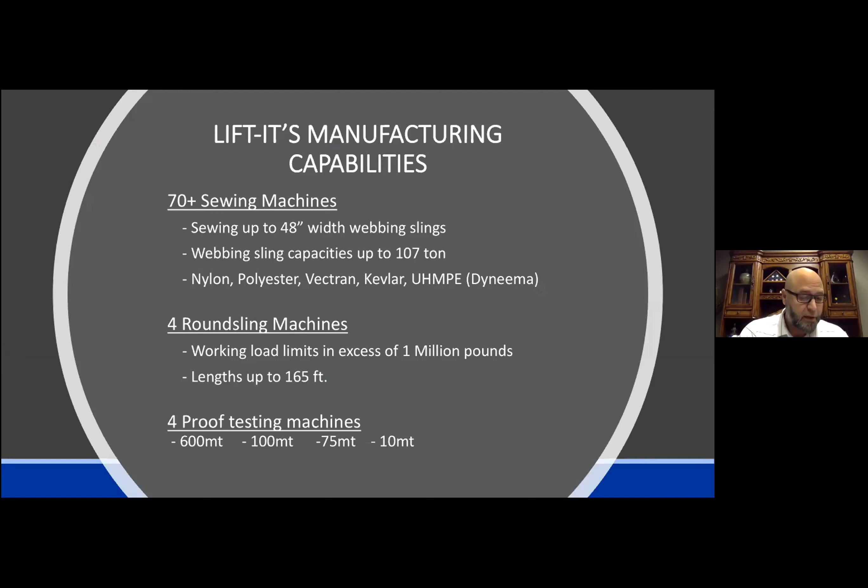We currently reside at 1603 West 2nd Street. Needless to say, we had some room to grow, bigger, wider, taller. So it's been a great addition. We're currently located about 15 miles east of Pasadena, probably 40 miles as the crow flies from LAX International Airport. In the past 40 years, we've amassed a fleet of 70 plus sewing machines, 4 round sling twin path machines, and 4 proof testing machines.

Many of you know Mike Sr. and can attest to his unwavering dedication to quality. He always told me, no matter what you do, just be the best at it. This is our purpose. Excellence is not our goal, rather our everyday normal. With a vast array of product offerings, from warnings to the cleanliness of our production environment, many would say you certainly get the whole enchilada with Lift-It.

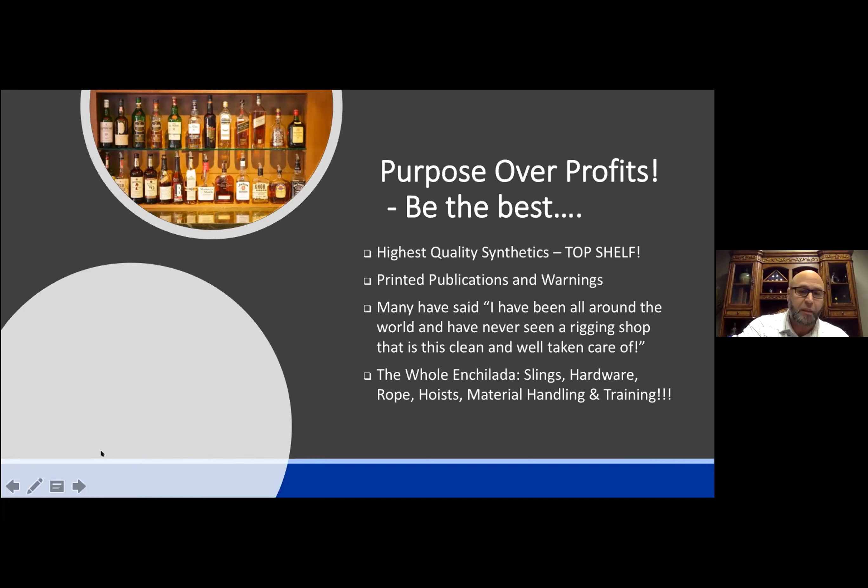Many folks that have come here can tell you how great we are, but if you walked in and our place was a pig pen, obviously you'd have some doubts, right? So many folks from around the world have been here and said it's simply one of the cleanest sling shops, and simply the gold standard.

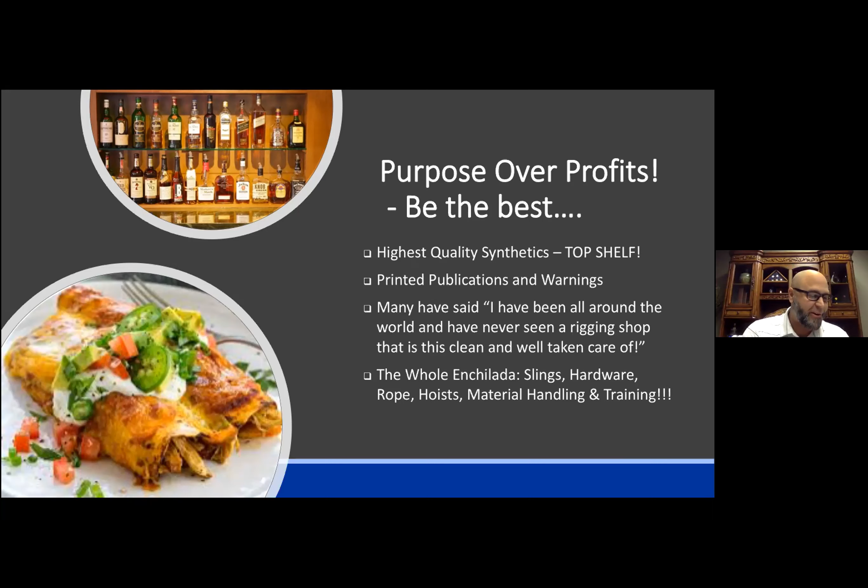We're best known for our quality, lightning fast lead times, superior tagging methods, product innovation, and last but certainly not least, user warnings and guidance.

Many folks make these claims, but I dare you to call me at 1 a.m. and get gear on your next flight at 0600 out of LAX. You think I'm kidding? Go to my website - my contact information is the first emergency number. Now, I don't know what I did to deserve that, but here we are, here I am. Just make sure when you call me that you have your credit cards ready, and we certainly do take American Express.

With over 150,000 slings, domestic and import, in stock, and nearly 20 tons of various types of K-spec fibers, HMPE, and polyester round sling, one could say we're certainly prepared for battle.

Here's an overview of our production facility in 2020. When you need additional room, you grow up - you go upwards, as long as you have the ceiling height. This was an additional mezzanine that we added, giving us 5,000 square feet of additional second floor production. This addition gives us much needed room for fabric processing, cargo net production, and fine needle sewing areas.

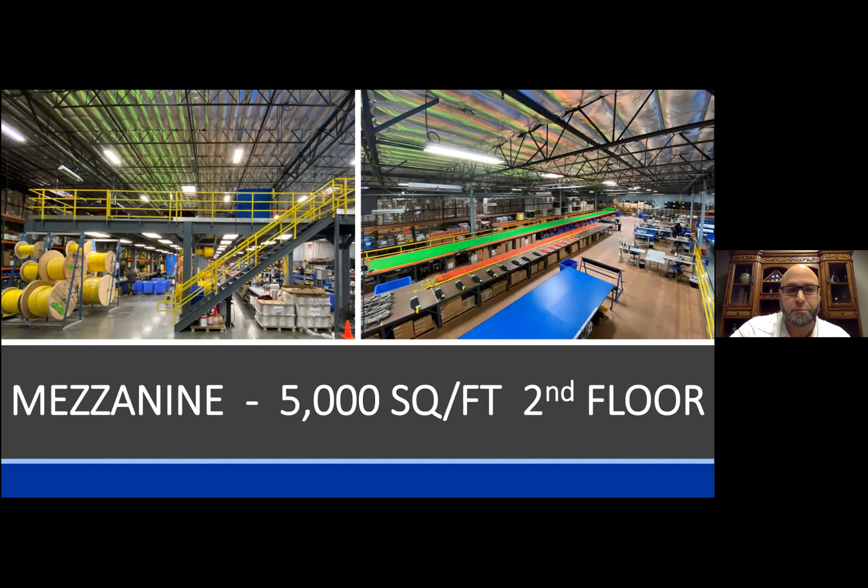With our recently added ZOM test bed, we have not one, not two, but four test cylinders. The largest being 600 metric ton, or 1.32 million pounds. And just as important as the high end of our testing capabilities is the low end range, where our 10 metric ton cylinder calibrates down to a precise 400 pounds.

I personally led our testing department for many years, having operated many test beds. I can tell you I'm truly overwhelmed with the quality that ZOM offers, not to mention their software. It's been a great pleasure dealing with a true gentleman, Mr. Arnie Nyman.

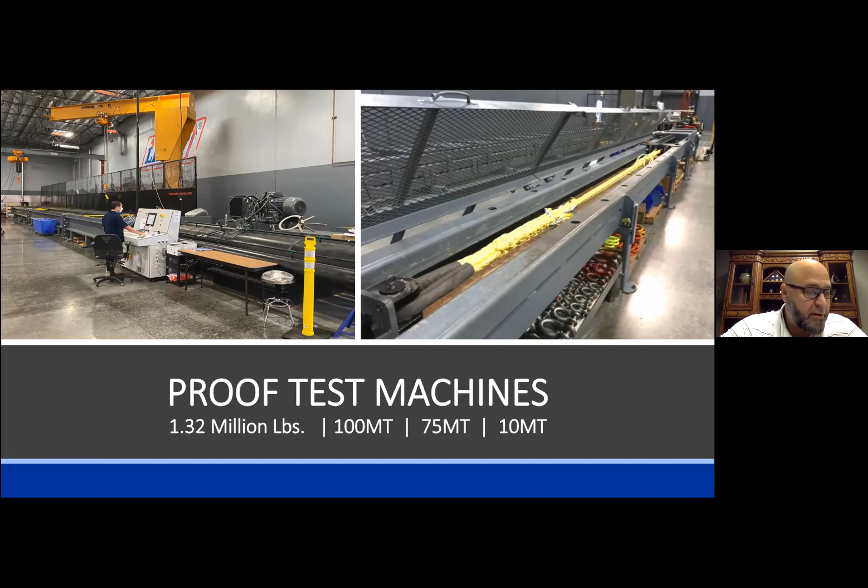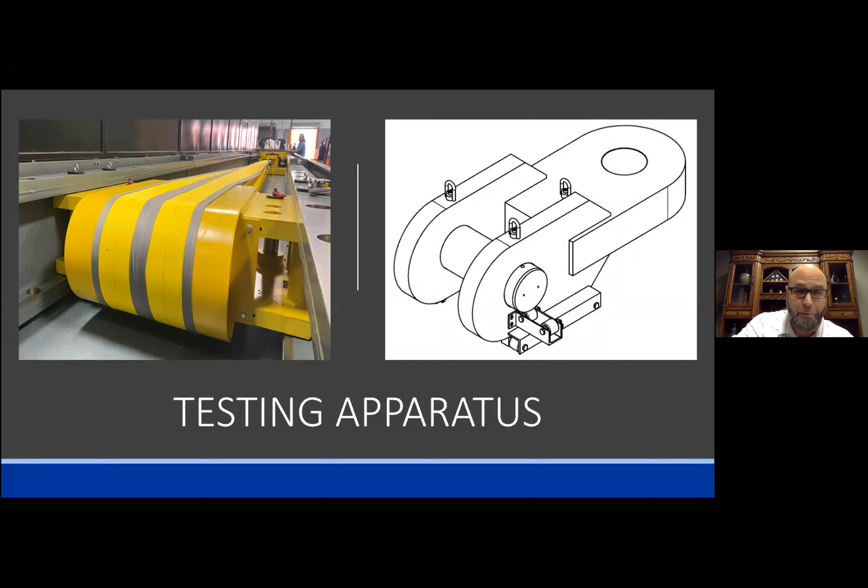Some of the testing setups I've seen and witnessed over the years, only Rube Goldberg would be proud of. We took synthetic specialists to a whole new height with the design and fabrication of our horizontal pin adapters and wide body cargo testing apparatus. To all of us that have tested a wide body cargo, we can all attest that we've maybe ruined one or two. So fixtures like this certainly help the application and testing.

Tagging, where should we start? Boy, oh boy - with great product comes great labeling methods. How many slings have we removed for illegible tags? A few. So I would say the days of the magic markers probably need to be put to bed.

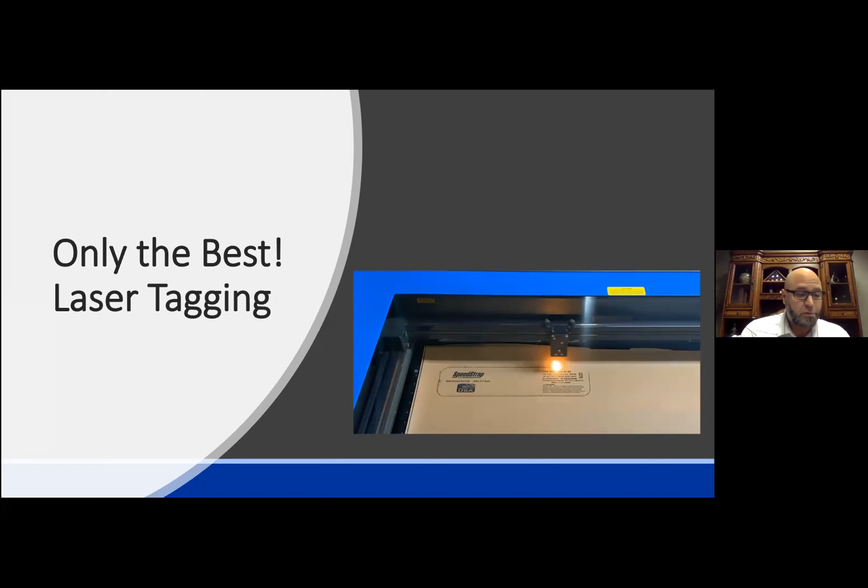We use a synthetic leather technology. It's twice as strong as standard leather, and also resists moisture and oil absorption. So it's definitely a very solid solution. And with the laser technology, it is very easy - your name, my name, your logo, my logo, truck number, crane number, you name it. This tagging method coupled with the tagging material yields one of the best tags in the industry.

One of the staples of our facility is certainly the Slingmax twin path and round sling department. With fabrication lengths up to 165 foot and ratings up to 1 million pounds, it only takes one call to become a believer in our ability to take it across the goal line.

And don't forget, when you become the President of the United States, we do have a debogging system for you, and we can pull you back onto the runway if your pilot overshoots.

Synthetic rope has often been around, we've been around for a long time, and is often used. But where we see many fall short is the tagging methods and user guidance. For the last 8 to 10 years, we've been on a phenomenal quest, which has resulted in some of the finest 12-strand UHMWPE, nylon, and polyester rope slings on the market. The growth has spawned the need for a dedicated synthetic rope department, complete with rope splicing tables, electric winches, and straight blade saws to make cutting this tough fiber a breeze. We also have additional splicing tables that'll be installed in Q3.

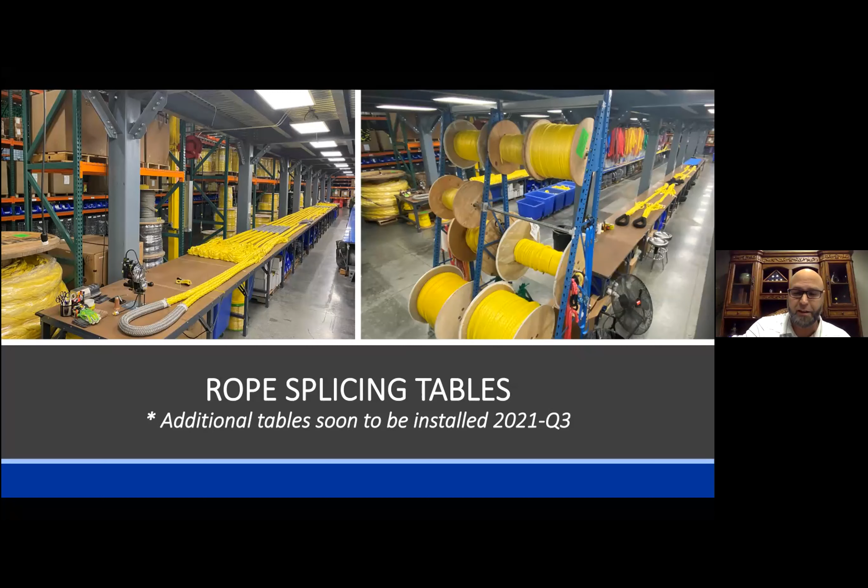With over 100,000 feet of UHMWPE 12-strand fiber ranging from 1/4 inch to 3.5 inch in stock, there is no job too big or small. We certainly splice them all.

Let's not forget about web sling production. Many of us, this is how we started and forged our company. And I often say for a few thousand dollars, you're the new proud owner of a sewing machine, and you move into a garage and boom, another competitor is spawned, right? So it's very easy to get into the business.

The truth of the matter is, in many cases, where many stumble is the skill and craft necessary to tackle big jobs and small jobs for that matter. So from 30-ton to 40-ton vehicle handling systems to 42-inch wide-body cargos that cradle fully loaded solid rocket boosters, we're ready, willing, and able to handle everything from mild to wild.

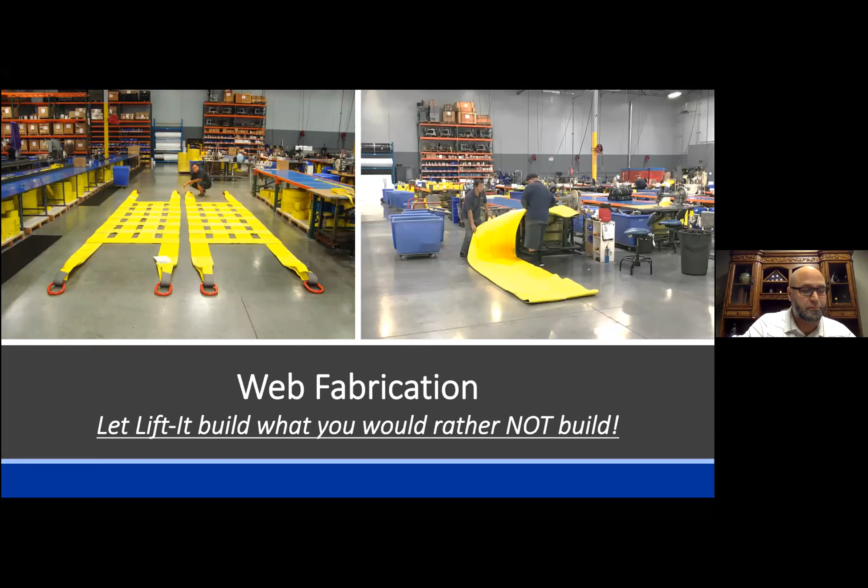Cargo nets are one of the most misunderstood products in our industry. We want to take your cargo net nightmares and turn them into pleasant, profitable dreams. No job is ever too big or too difficult. If you have a cargo net conundrum, need a helping hand, or decide to start one of the most successful private rocket companies in the world, look no further than Lift-It for your cargo net needs.

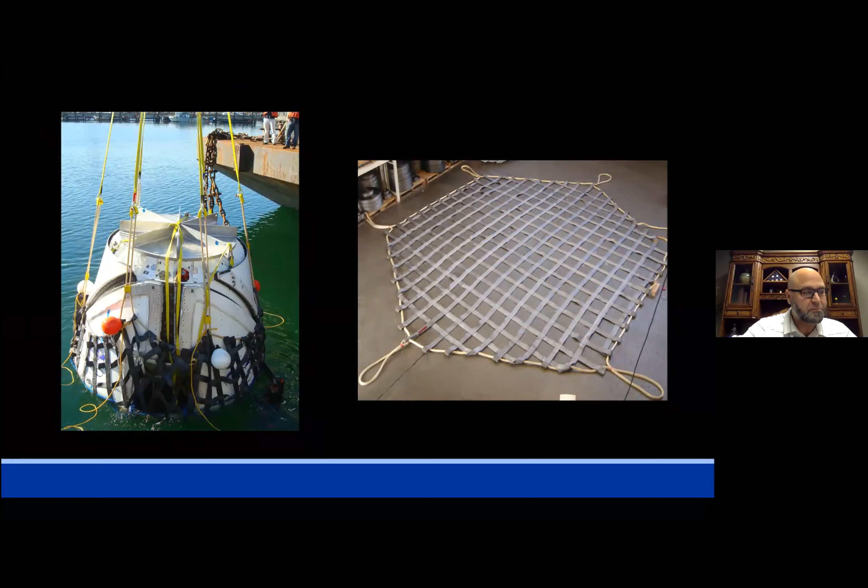Here's one more example of what many would look at and run far and fast from. This is one of the largest cargo nets to date that we've manufactured. It was so big we made it in 4 separate quadrants, each weighing in and around 800 to 900 pounds. Those quadrants were then connected with slings.

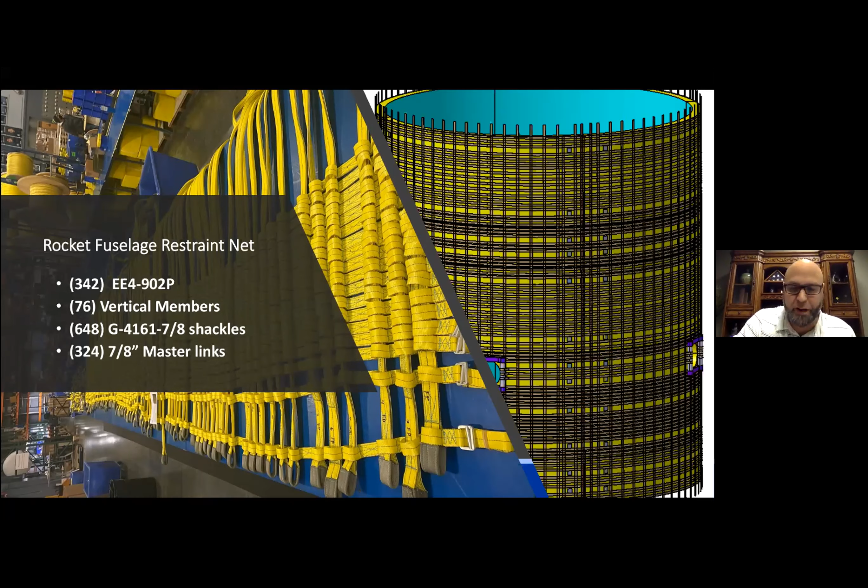It was about 400 4-ply slings, connected with 648 Van Beest green pin shackles, which then connected to a master link as a joining agent. Needless to say, it was quite a phenomenal feat of manufacturing and engineering. And if you can't let me borrow your rocket conical, fear not, we have a sewing machine and will travel.

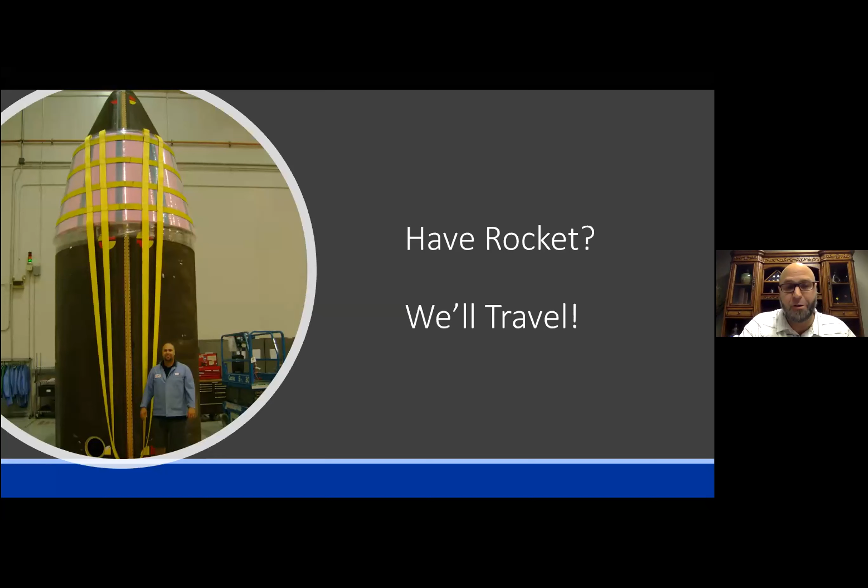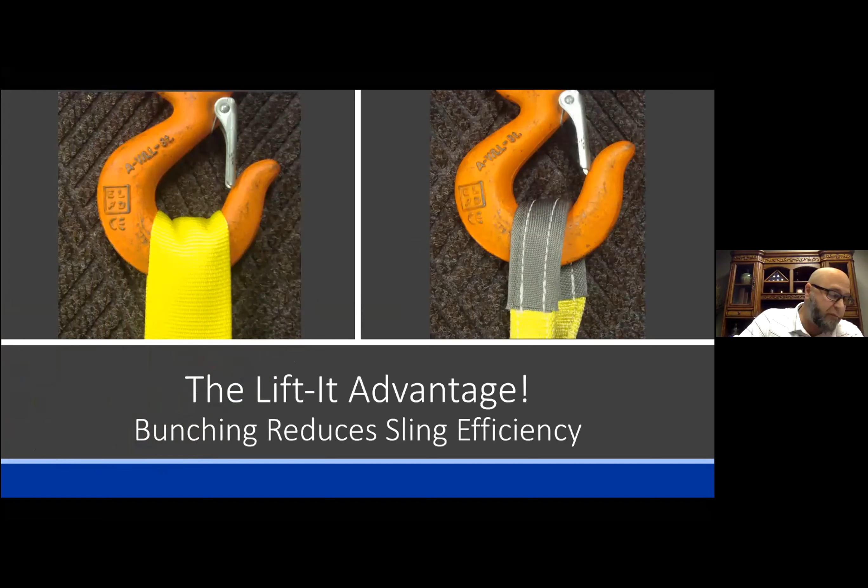The Lift-It advantage always yields longer lasting products. Simply put, you get more bang for your buck. From tapered and wrapped eyes as a standard feature on every sling, to properly sized hardware that offers proper spatial relationships and longevity at each connection point.

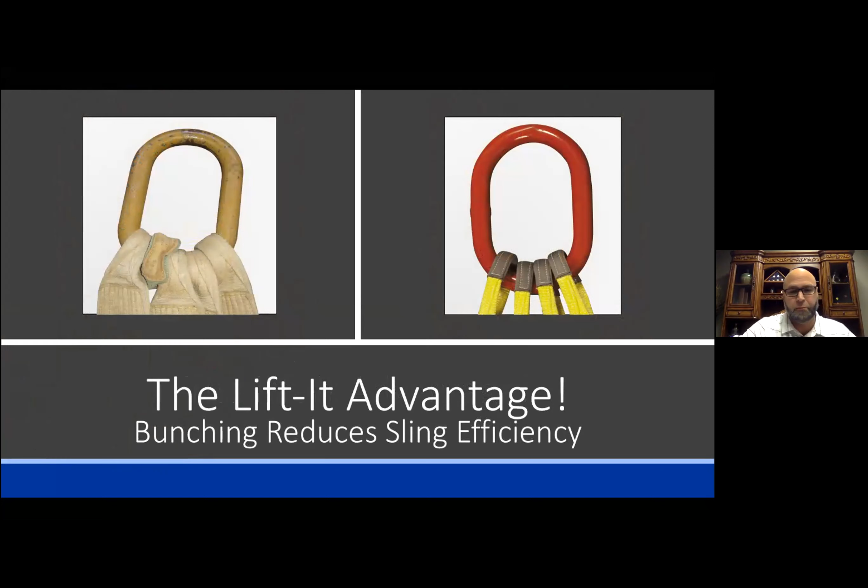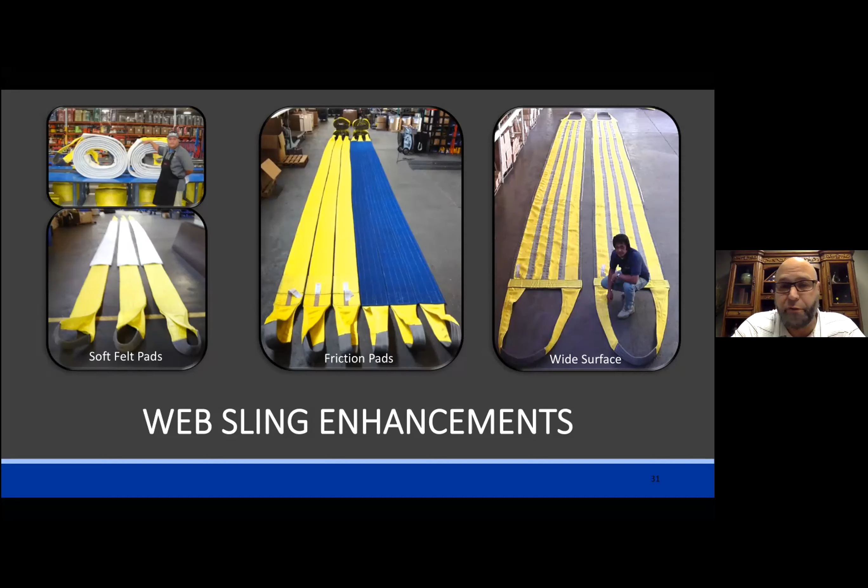Web sling features don't stop with tapered and wrapped eyes. There are felt pads that offer a smooth interface when handling sensitive coatings or paintings. When you need to roll or turn a load, the blue urethane friction pads profoundly increase coefficient of friction. Nothing is impossible with Lift-It.

Tap into our technical expertise and we'll certainly increase your sales. Our history must be looked at and delineated in centuries as opposed to decades. Many of our employees have been with us for 25 plus years. I guarantee you this will all result in a positive sale environment.

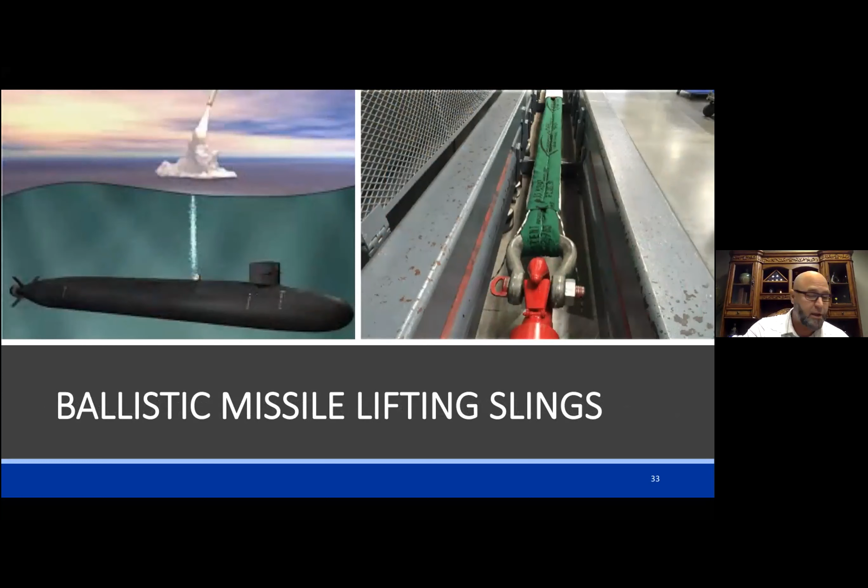From ballistic missile lifting slings that handle our nation's nuclear warheads in and out of the Trident submarine, to airbag webbing structures made from high performance Vectran materials destined to bounce off the lunar surface of the moon, we'll take you for a ride that's out of this world.

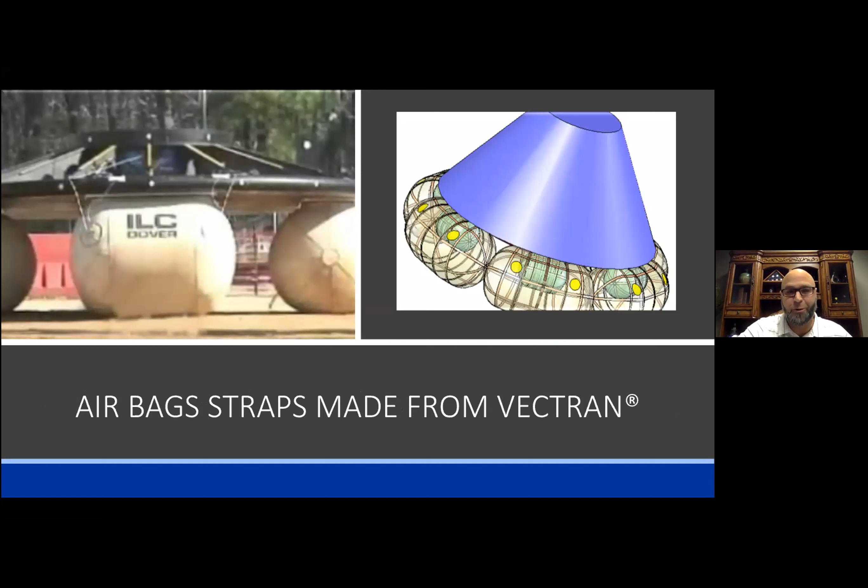It doesn't stop there. With projects such as testing rocket conical mounting flanges or complex tie-down systems intended to contain highly refined nuclear materials, the synthetic specialists at Lift-It will always deliver attention to detail and service.

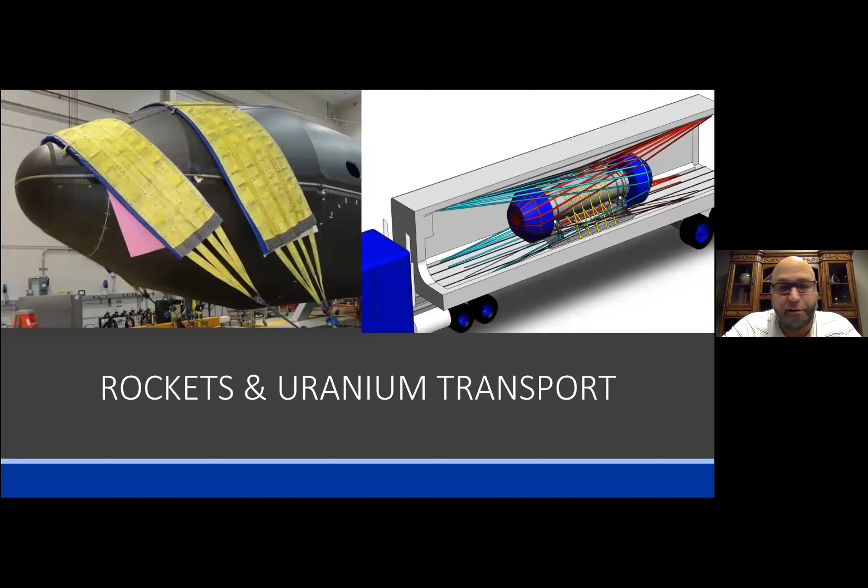It doesn't stop there. Always soaring to new heights, or atmospheric lows in this case, given the vertical limitations of helicopters, we offer a full line of human external cargo products that are ready to get you up and never let you down.

New products forge new paths with a full line of rated stainless lifting grapples and 40-leg bridles. Did someone just say 40-leg bridle? Yeah, we certainly did. When needing to load test your parachute assembly that slows an astronaut capsule when blasting through the atmosphere, we have a bridle that does just that. Every connection has the proper recommended hardware diameter sizes.

When you're the richest man in the world, you must have some 5-inch plasma endless grommets, right? These were connected to 400 metric ton Van Beest green pin wide body shackles. The synthetic specialists at Lift-It spliced these monsters to a length tolerance of 2 inches after setting the splices. We then measured and quantified those length tolerances at 660,000 pounds.

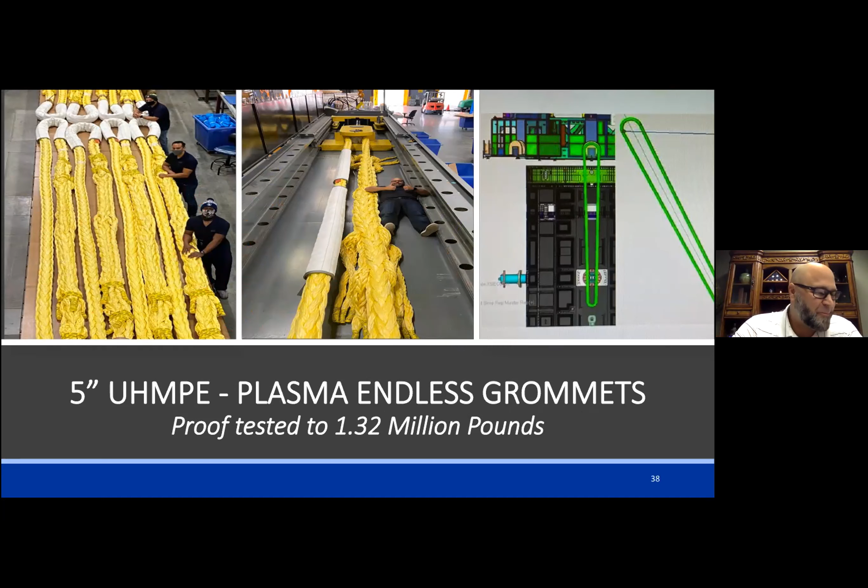Fear not, we all thrive in these tight tolerance scenarios. Definitely makes life interesting. From vacation yachts to fully loaded solid rocket boosters, we certainly have the skills to pay the bills.

If you haven't heard of SlingMax twin paths, my question is, what rock have you been hiding under for the last 30 years? Day or night, we're certainly loaded to the gills with the necessary materials to get your products on a train, plane, or automobile on site to your location.

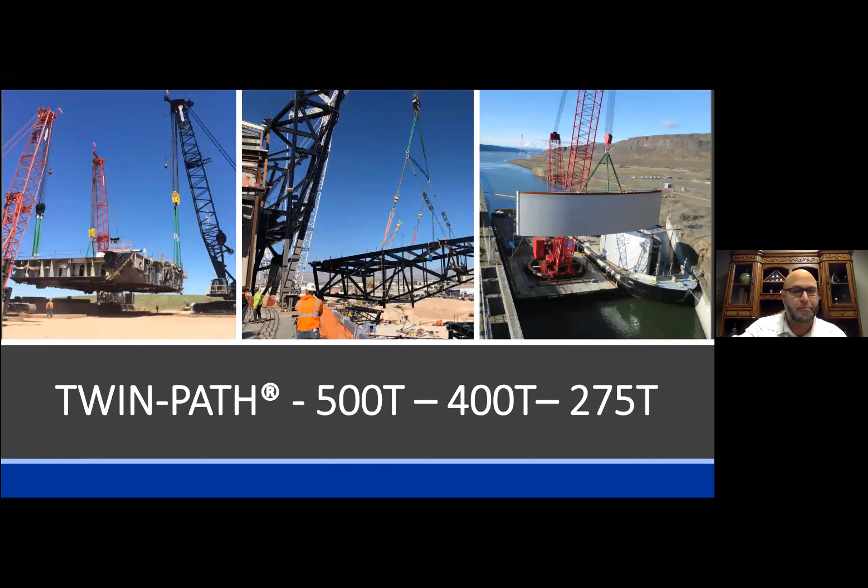Just last week, 60 Lift-It high performance fiber slings with check fast inspection system went out the door in 23 hours. 23 hours is a short amount of time to make this happen, but go on, Homer, you tell them, rock and roll, we got it done.

UHMWPE 12-strand rope products have certainly come of age and solved many spatial connection problems that exist when interfacing with load or connection points. Whether you're up against small bearing journals on a shaft that can't be damaged by steel, or wanting to connect 1 3/4 rope to a 30-ton alloy hook, UHMWPE 12-strand is just another tool in the toolbox.

Connection longevity and protection should always be of the utmost importance. If we as an industry don't provide these options up front, I feel we're doing a disservice to our community, our rigging community. End treatments, when discussed up front with the customer before damage occurs, should always be done. The selection needs to be based on severity of use, number of cycles, and connection interface. Addressing these areas will certainly put you on the top shelf in your customer's eyes.

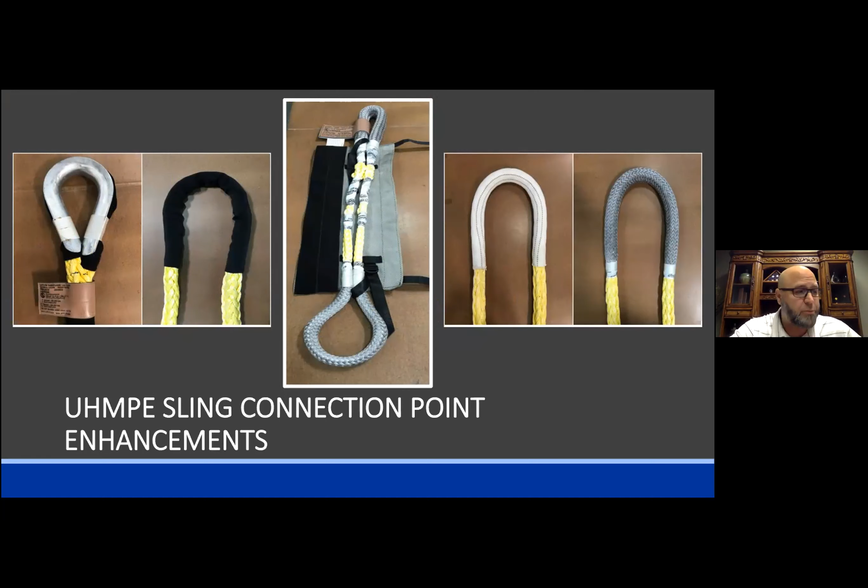Stainless thimbles offer one of the most synthetic friendly, smooth connections on the market, making it our first choice. Thimbles also compensate for the D/D concerns when permanently attaching UHMWPE 12-strand rope to links and hooks and things of this nature. With stainless thimbles not being made over 1 inch in diameter, what next?

Well, at Lift-It, we decided to purchase raw thimbles from Van Beest, and we surface grind them, hand polish them to be perfectly mated with a UHMWPE rope or nylon or polyester rope for that matter. Then we take it to another level and coat those and treat them with a corrosion resistance zinc plating.

Adjustable UHMWPE 12-strand rope designs are readily available in excess of 50,000 pounds vertical rating per sling, making the task of rigging to that CG or trying to get your load to lift level certainly a breeze.

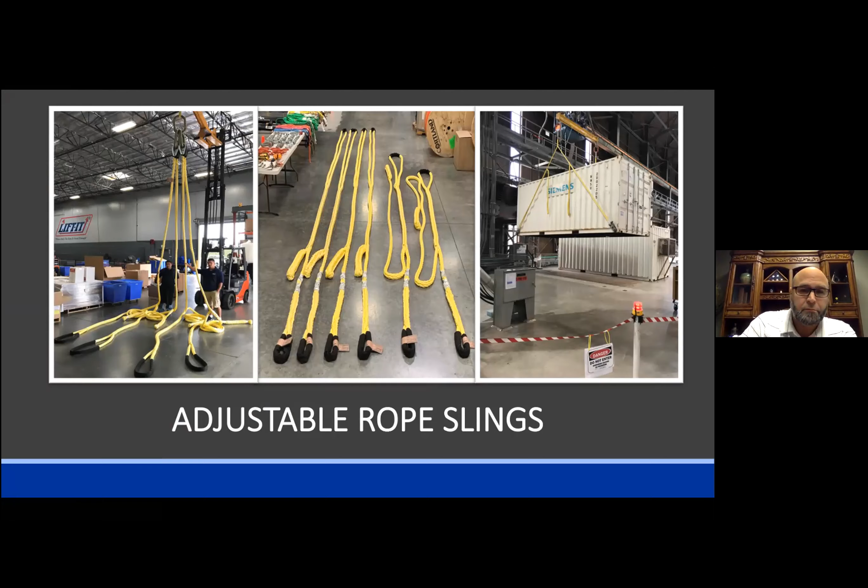Recovery products are certainly becoming more prevalent in our industry, with the saturation of lawyers claiming failure to warn. Specific equipment for specific job functions is an absolute must. Welcome to the new breed of recovery products, available in many shapes, sizes, lengths, you name it.

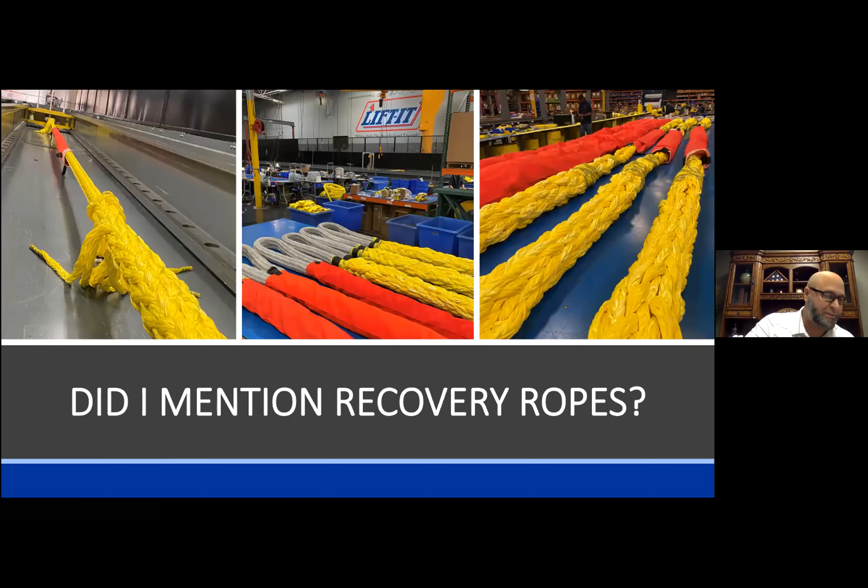And then if you can't get your employees to come back to work, hop on a twin path machine and get her done. So 450 miles and 9 hours later, we were recovering a Caterpillar bulldozer.

We even have a full line of recovery products for Johnny Sixpack and the gang of weekend warriors, for the little 1-ton truck and Jeep guys. But we do ask Johnny, never 4-wheel drive and drink at the same time, and certainly don't recover your vehicles if you've been drinking.

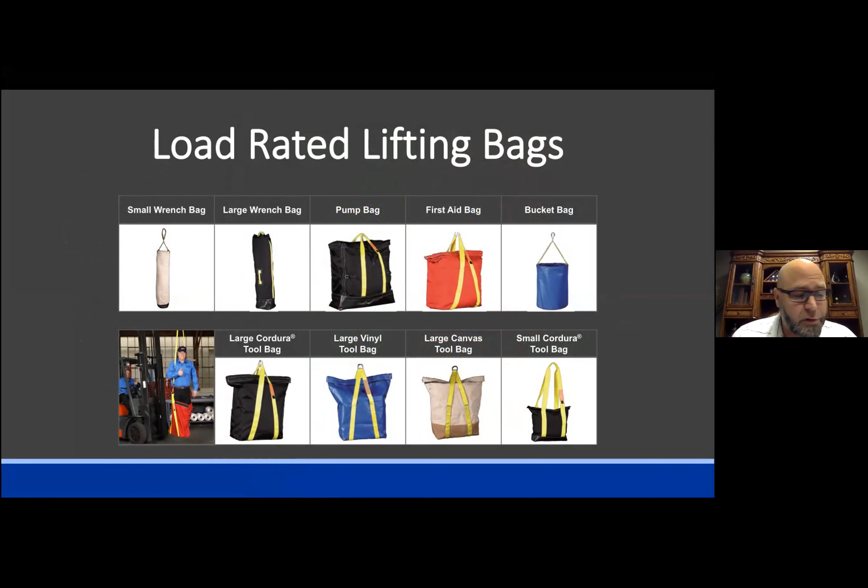Load rated lifting bags, absolutely. How are they rated? Once again, the team of Lift-It sling specialists not only quantify the capacity and design factor for each and every design, but we also provide removal from service criteria and inspection protocol for these products. Custom lift bags for custom lift applications, certainly.

Warnings, a single word that brings us to our knees every time we hear a knock on the door and get served, right? I think many of us can attest to that. I feel we can all agree this is one area that is often overlooked, not to mention the low-hanging fruit in litigation. In all honesty, we spend more money developing and printing user manuals, warning tags, and product safety bulletins than I do on my product liability insurance coverage. You may think that's insane. We certainly don't think so.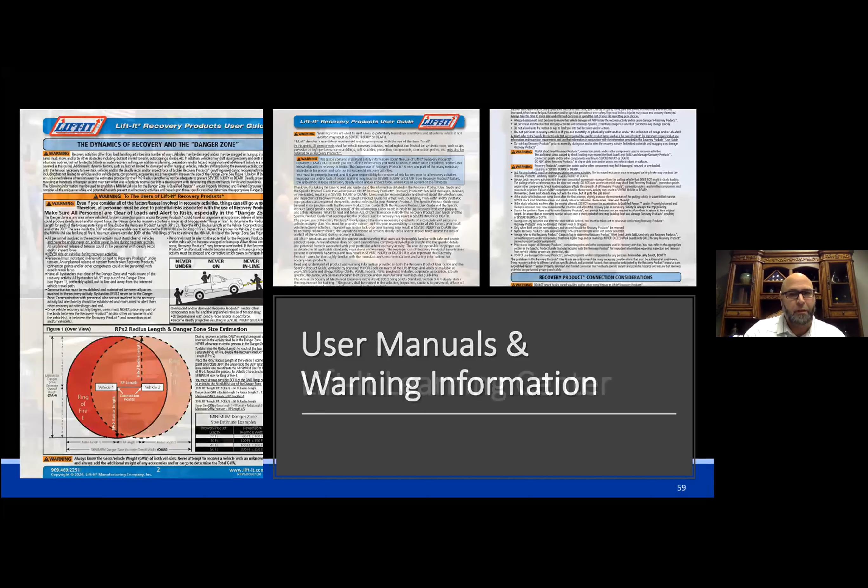Training, my oh my, where do we start? Lift-It found this need extremely evident back in the 1980s, before many companies had safety departments and really long before training was a requirement, and not to mention before it was fashionable, right?

This holistic approach we took has led to literally tens of thousands of folks knowing more about the products they use, and ultimately creating a safer work environment because of that knowledge base. This is and will always be a staple of our organization, and this is done on site and/or at our location where we have a 40-person training room.

I hope you found the last few minutes worthwhile. If you make your own products on a small scale and/or a large scale for that matter, we certainly welcome the opportunity to serve in any way you see fit.